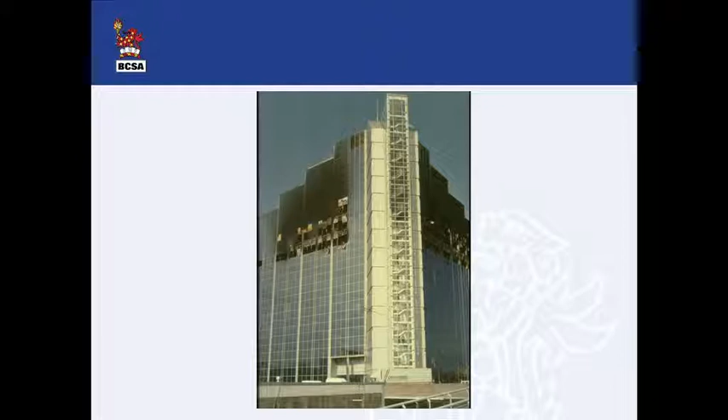And that was the bad news. The good news was that the building was owned by an insurance company. But the building, a big, huge, severe fire, and the building's still there. There was actually no structural damage. If you'd gone into the building afterwards, this is what you would have seen.

That building was fire protected by a very common combination of fire protection materials at that time: a spray protection system on the beams, which we'll see more of later, and a board protection system on the columns. That building had 90 minutes fire resistance. It was fire protected to resist a fire for 90 minutes. It survived a 4-hour burnout with no structural damage, and in fact that building was fully reinstated.

That shows one thing in particular: that if we get our fire precautions right, if we get the fire protection in there right, the buildings are safe, our rules are good. That particular building had 90 minutes fire resistance. About a couple of years later they changed the rules, and a building like that would have had 120 minutes plus a sprinkler system, which tends to show that perhaps sometimes our modern rules are too conservative. Again, that's a theme which we'll build on through the day. But if you get it right, the buildings will be safe.

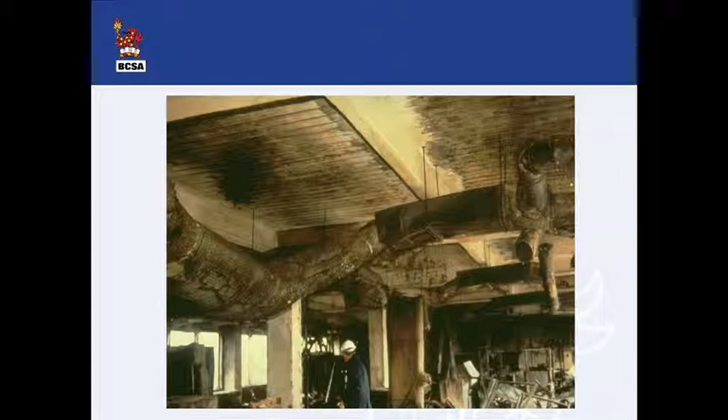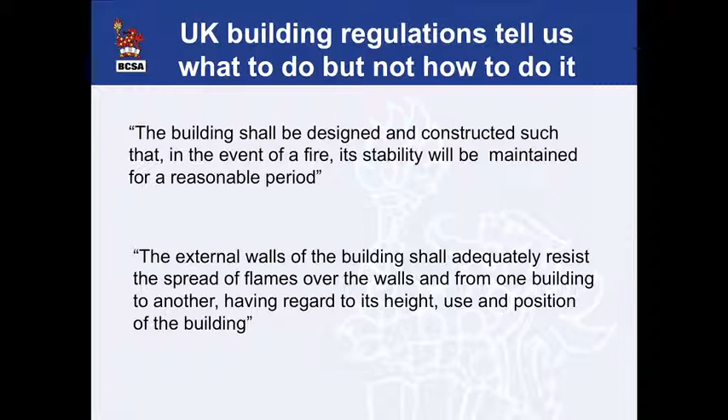We live in a society where our building regulations are couched in functional terms. Our building regulations set out what the legal requirements are for us as engineers, for people responsible for making sure that buildings are safe. They're couched in functional terms - in other words, our building regulations will tell us what to do, but not how to do it. What I've done here is taken two elements, two small excerpts from the building regulations, one covering stability and one covering spread of flames. That tends to be the way in which they're couched - very simple, very straightforward. But the building regulations don't tell you how to achieve that.

Fortunately, the government produces approved documents. You'll all have seen approved documents, and that's what they are - ways of interpreting the building regulations. They're not the regulations themselves. Approved Document B covers fire, and its status is that if a contravention is alleged, it will be taken as evidence tending to show that the requirements of the building regulations have been met. But what you tend to find is that the majority of buildings designed in England and Wales are designed according to the requirements of that particular document.

The fire protection requirements are calculated according to height, or they change according to the height of the building, and the height of the building is the height for access for the fire brigade. So the height tends to be the height to the top storey. Fire precautions change according to the height of the building.

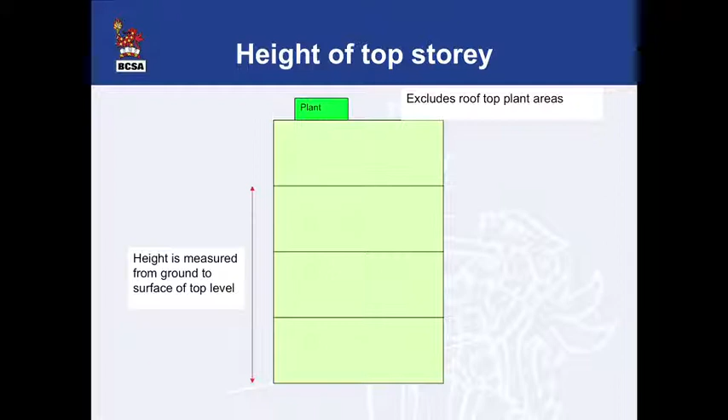There are alternatives to Approved Document B now. BS 9999 is an alternative to the approved document. It's out there, it's available. It's not massively widely used, but you can use it. A lot of the time, the fire resistance requirements in BS 9999 are lower than you'll find in the approved document. For example, an office building over 30 metres in the approved document would require 120 minutes fire resistance plus a sprinkler system. The same building in BS 9999 would require 75 minutes, so a reduction from 120 to 75. In BS 9999, two-storey office buildings less than 1,000 square metres in plan can be left unprotected.

You might think there can't be a lot of those, but there are actually a huge number. There's a huge number of relatively small office buildings in this country, so that is quite significant.

So BS 9999 is an alternative. I quite like 9999 for a number of reasons. First of all, when you look at the approved document, in my opinion, there's an element of suck it and see in terms of how it's been developed. In other words, the rules have developed because we know they work, but built into them is quite a lot of conservatism.

But 9999 is based on an understanding of what actually creates risk in fire. And if you look at what creates risk in fire, the four main factors are the height of the building, the familiarity of the occupants with the building, whether the occupants are asleep, and the degree of mobility.

Of those, the big ones tend to be whether the occupants are asleep and their familiarity with the building. Which is why in a hotel, one of the reasons hotel fires tend to be so dangerous, and why hotel management put so much emphasis on fire training for staff, is because those big two factors are there: people are asleep and they're not familiar with their surroundings.

So the requirements of 9999 are a function of those parameters. They're worked out on the basis of which of those risks are there and to what extent.

9999 also takes into account things like what is in there that is likely to burn, what the compartment size is, and whether sprinklers are present.

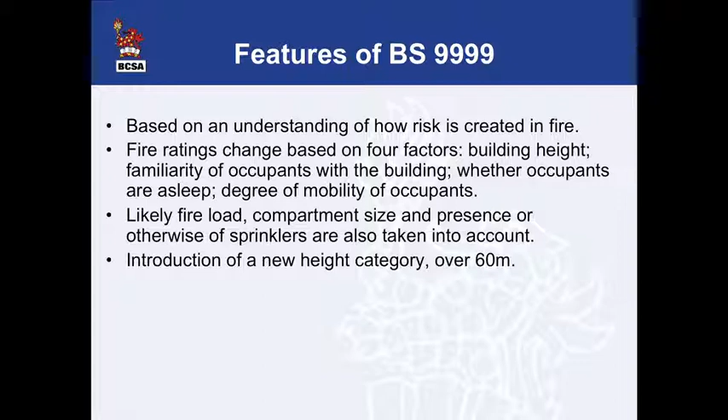It also recognises, which is something missing in Approved Document B, that very tall buildings over 60 metres are relatively rare, despite the level of publicity that buildings like the Shard get. They are relatively rare, but buildings over 60 metres are treated as special cases.

That's as much as I want to say about 9999. Mainly we're here today to talk about fire and fire engineering.

One of the critical things in the approved document is that it does not try to be all things to all people. What it says is that if you're looking at large and complex buildings, you might not want to use Approved Document B in particular, and you will look at an engineered approach instead.

So that statement, that's a direct quote: fire safety engineering can provide an alternative approach to fire safety. It may be the only viable way to a satisfactory standard of fire safety in some large and complex buildings. That's a direct quote from Approved Document B.

So for these types of buildings, the approved document is pointing you towards an engineered approach rather than the approach of Approved Document B itself.

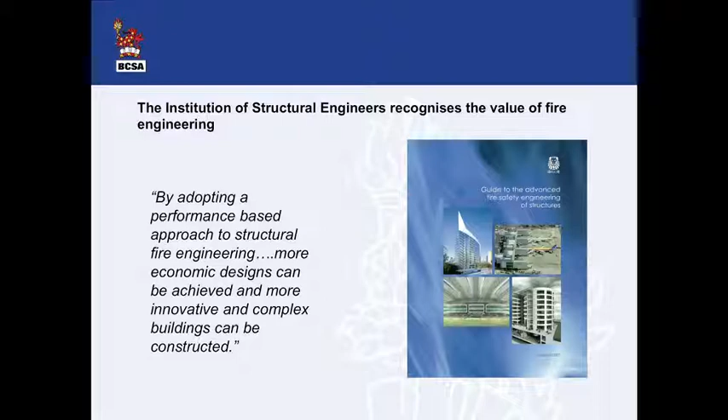And the Institution of Structural Engineers have a fire study group, and they have reproduced something similar. It says that by adopting a performance-based approach to structural fire engineering, more economic designs can be achieved, and more innovative and complex buildings can be constructed. So there's a lot of support for engineered approaches, both from the writers of the approved document and from the Institution of Structural Engineers.

But moving on now, I'm going to talk a little about fire protection, structural fire protection in particular. There are three very common methods of structural fire protection, but by far the most common is an intumescent coating, often called intumescent paint. These are probably responsible for about 70% of all structural fire protection in the UK, a very, very common form of fire protection.

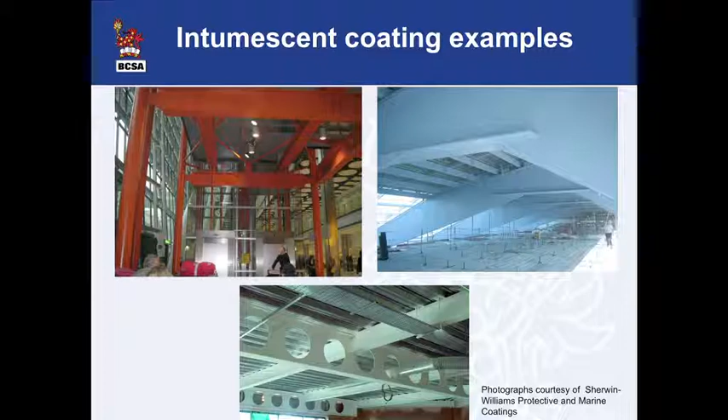For those of you who don't know what an intumescent coating is, that's what they look like when applied. But if you put an intumescent coating into a fire, it will swell and form a char, and it's that char that gives it its insulative properties.

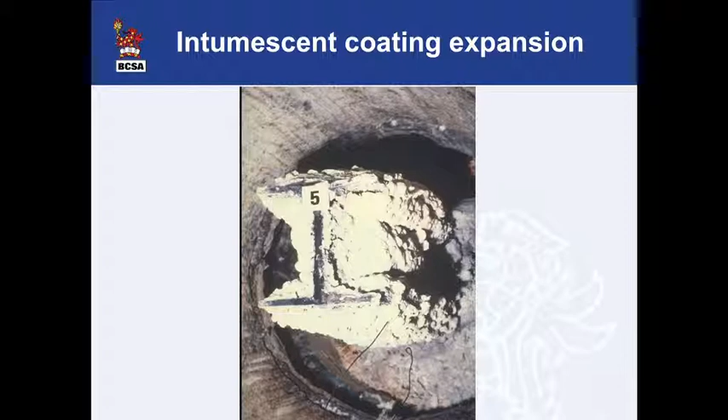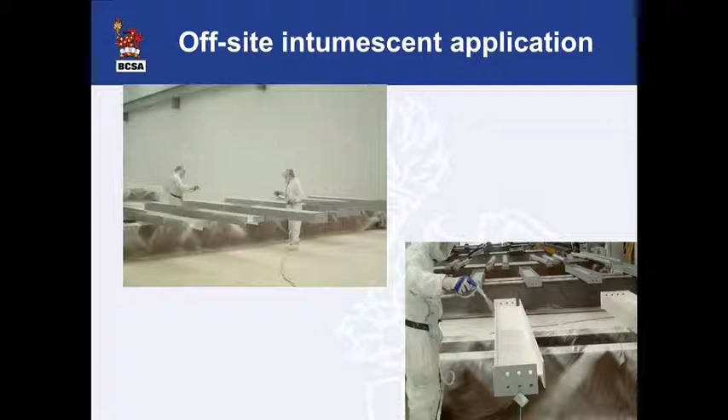There is, in the United Kingdom, a very successful and very innovative off-site industry which applies this fire protection off-site. This has been developed properly for about 15 years now, but it has been an immense success, and we're now actually exporting it. I'm hearing of projects in places like Denmark, Ukraine, France, Germany, which use this off-site process. The off-site process isn't the answer for every job because it is a premium process.

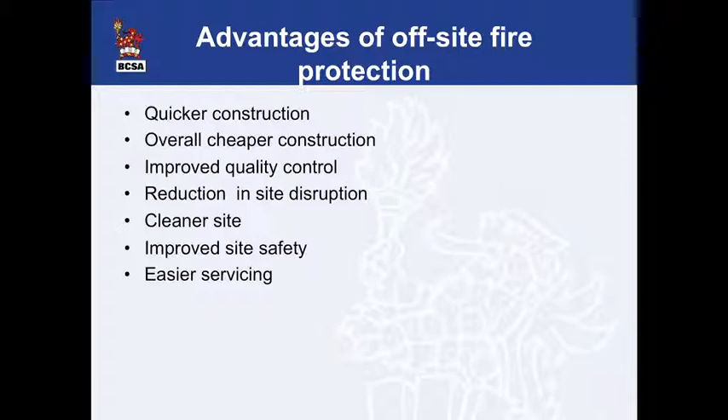It costs more to do the fire protection off-site than on-site, but it has distinct advantages for certain types of projects, especially where the fire protection is on the critical path, where you have difficult site access, where weather dependency is an issue, that sort of thing. But it's been very successful, and it has been a great British innovation. There are literally thousands of jobs which have been done off-site now, using off-site intumescent.

If you're going to do fire protection off-site, it's very important that it's done properly, and therefore the SCI, and initially the SCI, and now the Association for Specialist Fire Protection - Wilf will be from the Association for Specialist Fire Protection and will talk after me - have produced a code of practice. This includes typical contract statements as well, which you can effectively take out of there and put into your own contract documents if you want to do so.

You don't have to use intumescent coatings. You can use different types of fire protection. You can use a board protection system. We saw that at the fire in Basingstoke. And you can use combinations. So this is a combination, a board fire protection system with an intumescent coating system - board on the beams, intumescent on the columns.

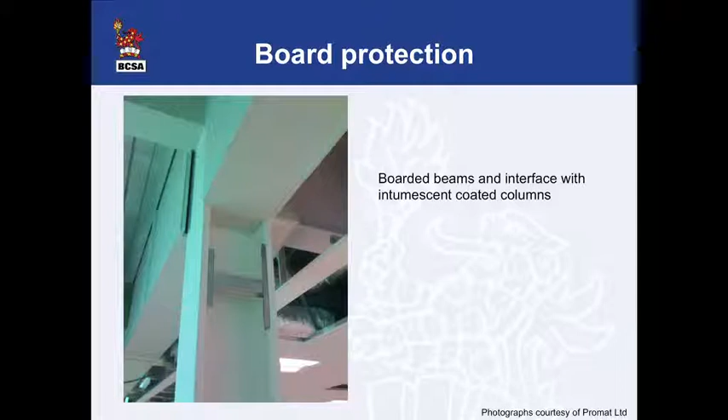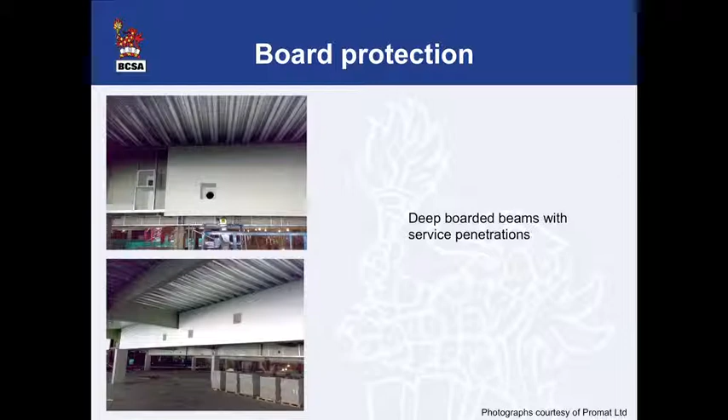And boards are very adaptable. You can do a lot with them. You can put holes in them if you want, for service penetrations. Or you can also put them around complex shapes as well. So you're not constrained to just straight lines with board protection systems.

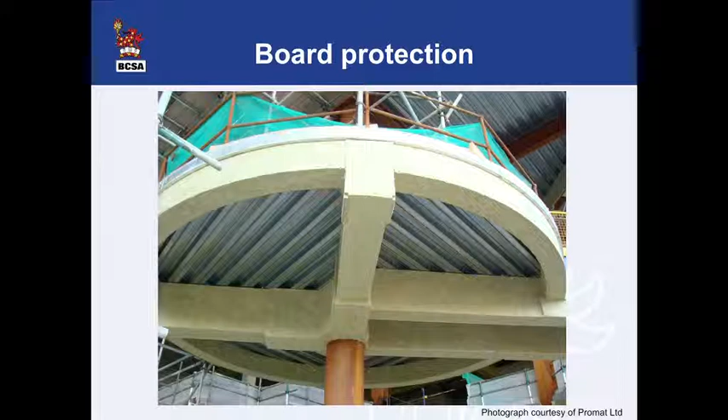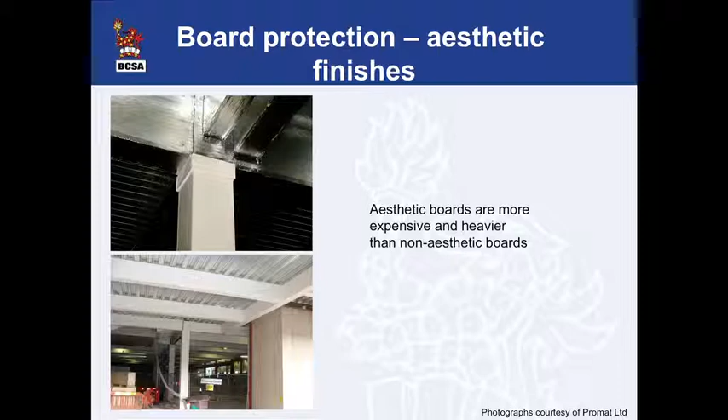And you can use various combinations. There are two families of boards: heavy-duty boards, which you'd use for aesthetics, and lightweight boards, which you'd use generally where it's non-aesthetic. It's important you get the specification right because the cost differential is quite significant.

You can also use spray protection systems. This is the stuff that was used on the beams at that Basingstoke fire. Again, quite popular. Anybody here who has worked in America in particular will probably have seen loads of this stuff - it's very widely used there. Much less common here, but it is used and has its place. It's probably got about 5 or 10% of the market, I would say, where it is used.

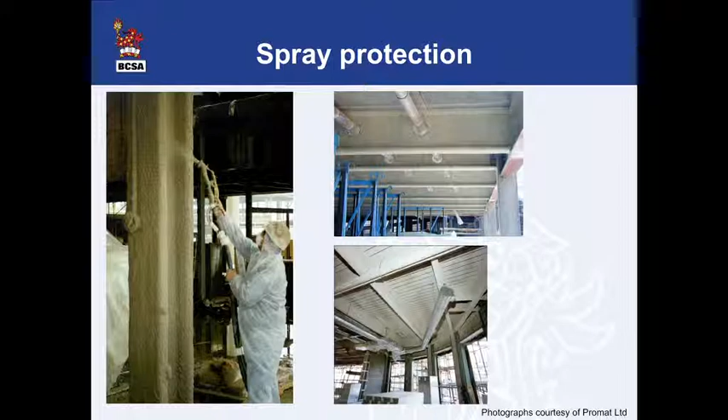You can also use flexible blanket type systems. These are relatively rare - it surprises me that they're as rare as they are. There's only 1 or 2 manufacturers. I think they're a very good product - a flexible, dry application - but they've never been massively popular in the industry, although they are very much a niche product, I think.